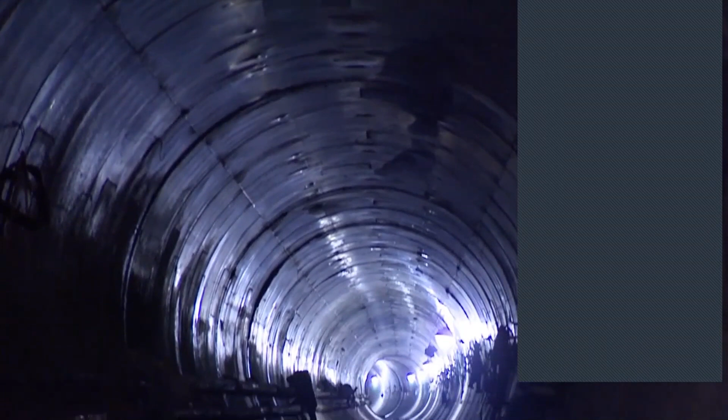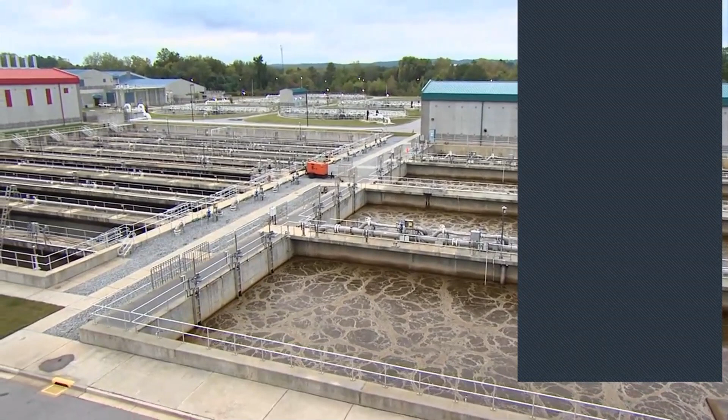During dry weather, it's not a problem, but when it rains and a pipe fills capacity, electronic sensors are triggered. Sewage and stormwater containing pollutants from the streets are discharged into the river, violating the Federal Clean Water Act and generating millions of dollars in fines. And EPA has been demanding of most cities that they build big tunnels, big tanks, big storage systems in order to be able to handle the additional flow from rainfall. The problem is they cost $8–10 billion, and we didn't have $8 to $10 billion.

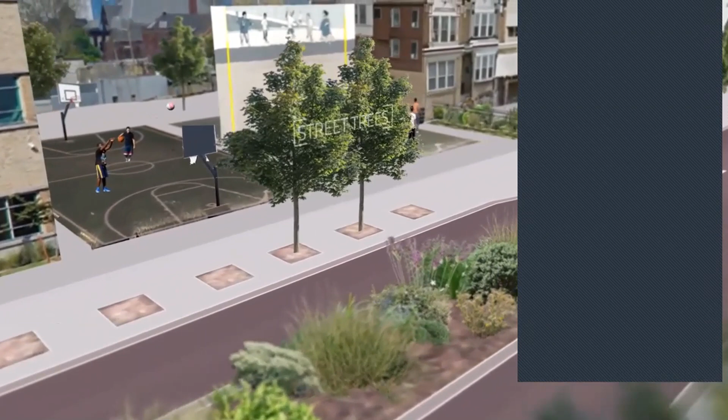So we took a different attitude. We said, well, why don't we try to manage the water before it gets into the system? Every dollar we spend gets spent on the surface, creating a more sustainable city. We call it green infrastructure. Others call it green stormwater infrastructure. Whatever you call it, it's really about managing the rainwater and doing it in a way that gives some extra benefit back to the community.

On April 10, 2012, the leaders of the City of Philadelphia and the Federal Environmental Protection Agency announced an historic agreement. It allowed the city to institute Green City Clean Waters, a program to transform a third of the city's hard surfaces with green.

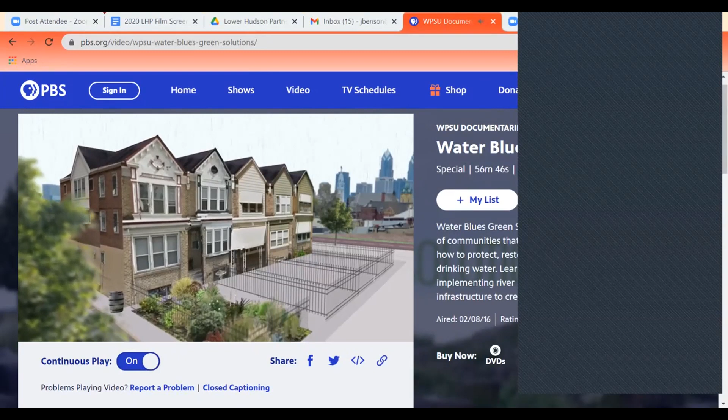Our goals are to place 10,000 greened acres around Philadelphia. That is a dramatic change. We're talking about doing it over a 25-year period. So this 5 years is really the experimental time. It's the time when we figure out what are the good designs for how you take water and infiltrate it into the ground.

As part of the Green City Clean Waters program, the Philadelphia Water Department is experimenting with an innovative approach to capturing stormwater on the properties of individual homeowners. Yeah, come towards me.

We have a lot of residential customers in the city of Philadelphia, and we wanted them to be able to participate in Green City Clean Waters right in their own backyards. The goal of the program is to provide something that benefits them and helps the city of Philadelphia. And so through the program, the water department helps pay for the cost of installing stormwater management tools. So if the water from your front walk is running into the street, then that would be a good opportunity for us to do something.

So I've been with the water department a year now, and I studied urban and environmental planning, and I was really interested in Green City Clean Waters. Philadelphia is leading the way there, and I wanted to be a part of that.

Whatever shape you need. The water department will reimburse up to a 6-foot long planter box. Okay. On this particular property, she has a couple of good options, one of which would be a rain garden in the front yard, which would be a nice little landscaped space. It'll look great. It'll soak in a fair amount of stormwater. So then you'll have part of your crew working here and part of them working on the downspout. The piping work, yes.

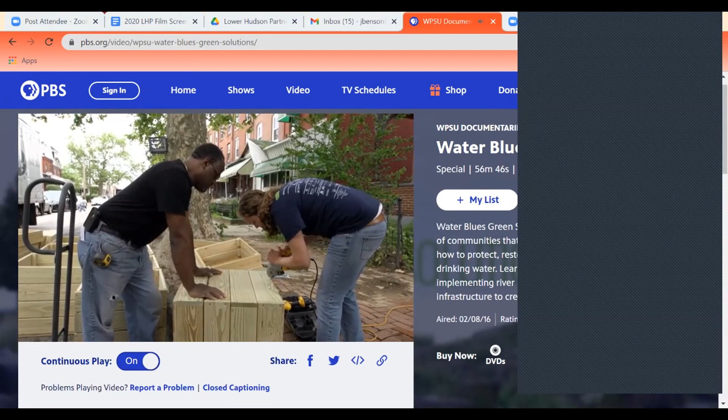Transforming how a major city manages its stormwater can't be accomplished by one city agency alone. To transform the fabric of a neighborhood, it requires partnerships with grassroots organizations with boots on the ground. We are a nonprofit that does free critical repairs for low-income homeowners. That includes energy efficiency work, health and safety repairs, and anything critical to a home. But we cluster that work on blocks where we do multiple homes.

Brown Street. And today our focus is on the stormwater management piece. Today we are installing downspout planters, and that's a box that goes at the bottom of a downspout, and it manages roof runoff that comes down your downspout, and you can plant it like a regular planter.

I've learned about sustainability and consumption and all that, and that's a good way to conserve water. And also it looks nice when you put your flowers in there.

I want to put mint in mine. Yes, I'm going to make tea, but I'm going to make mojitos also.

The water department has taken a truly grassroots approach to sort of, we'll do it bucket by bucket, house by house. We absolutely hope that we can educate more people about the environment and stormwater management specifically for the water department. And I think we've been able to build community as well.

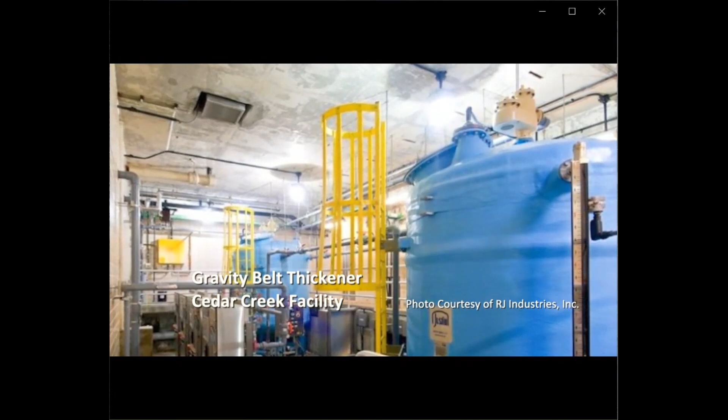Nassau County has been on the forefront of stormwater management since the 1930s. We've installed a number of green infrastructure components at 2 industrial type facilities in Nassau County, at both the Cedar Creek Water Pollution Control Facility in Wantagh and the Bay Park Sewage Treatment Facility in East Rockaway, where we installed almost like a laundry list of green infrastructure technologies as a way to show other municipalities who have these facilities these components, how they work and how effective they are.

Operation Splash is a grassroots, all-volunteer organization dedicated to cleaning up all the debris out of the South Shore Estuary Reserve in Nassau and now into Western Suffolk County.

In Splash's education program, we try to explain what a watershed is to young kids. And we tell them basically if you were to take a pile of dirt and take a cup of water and pour it on top of that pile of dirt, all the water would run down to the side and out to the bottom. And the bottom of the pile of dirt is the bays or the Sound. So any garbage that's on that mountain or in that watershed area is going to come out into the bays or to the Sound. And the kids pick it up like that. By itself, rainwater is pure and wonderful, but when it picks up our garbage, it's a problem.

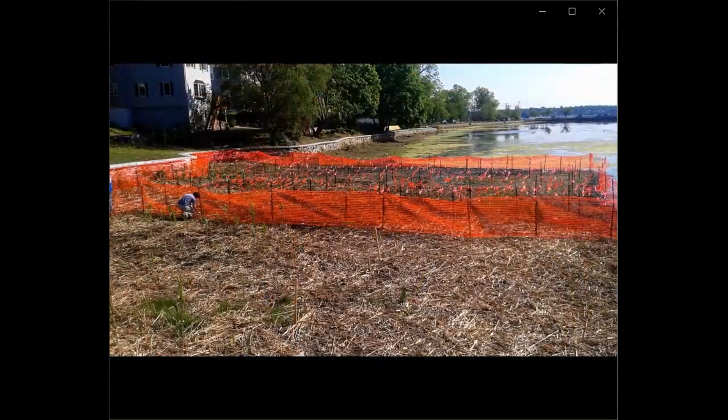There are so many people, so many organizations around New York State that are dealing with these issues. It's really hard to name them all. We have the soil and water conservation districts. We have intermunicipal protection committees, for example, the Hempstead Harbor, Manhasset Bay, and Oyster Bay Cold Spring Harbor committees, and the Peconic Intermunicipal Consortium here on Long Island. There are also joint efforts in upstate New York.

The DEC has entire programs directed at this, as does the EPA. The Audubon Society, Friends of the Bay here on Long Island. Schools are doing a lot. And also, let's not forget the business community. There are a number of businesses now that are looking at practices, ways that they can provide our communities with practices that can help us deal with this kind of pollution.

Water Wash here in Mattituck is basically a redesigned public boat ramp, which was created to keep stormwater from running directly down the boat ramp into surface water and to give it time to slow down and infiltrate into the ground before it ever reaches Mattituck Creek. The stormwater runs off the road. Essentially, what used to be a dirt drive area has gravel. That gravel driveway slows stormwater down and allows some pollutants to drop out at that level.

The stormwater that passes the gravel gets to the porous paving area, and that porous paving area allows more of the stormwater to filter down into the ground. And by filtering down into the ground, the pollutants are kept out of the surface water. And in the event of a very large rainstorm, any water that gets over the filter pavement goes into a natural drainage swale, and that swale retains remaining stormwater, giving it a longer period of time to soak into the ground before it reaches Mattituck Creek.

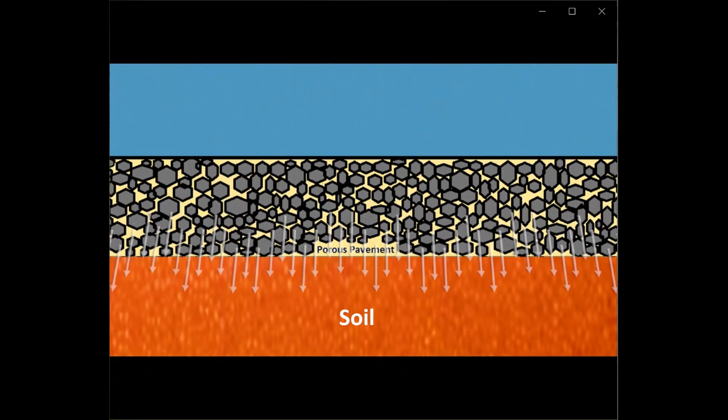Porous pavement is one type of green infrastructure, and porous pavement essentially is a hard surface that has the ability to absorb water. When you put water on top of a porous pavement, you still have the hard structure of pavement, but the water goes down through it as opposed to sliding over it. And by retaining that water going down as opposed to over the top, you can hold pollutants back, you can hold sediments back, and you can provide for better water quality protection at the end of the line.

Rain garden is a shallow bowl that we direct water to on purpose. Rain gardens mimic nature. So what we try to do is we have a spot for water to be collected, and then we let that water soak back into the groundwater. If the water soaks in a day or less, it's a rain garden. If the water sits there longer than a day, it's not a rain garden. It's a swamp, a bog, or something else.

So then we plant that rain garden with deep-rooted plants. The plants take up that water, soak up that water, use that water, and clean that water almost to drinkable standards within 2 to 3 feet underneath that soil.

Most people think that a rain garden is a wet spot, so you want wet plants. It's actually the opposite. You actually want dry plants that can handle some water, not wet plants that can handle drought. The rain garden is only wet when it rains, so it's only wet a small percentage of the time. You want more dry plants that can handle water.

Hydrangeas do make a good rain garden plant, as well as black-eyed Susans and purple coneflowers, a number of trees and shrubs. You can put rain gardens in shade, so that hydrangea for the shade, but also hostas and ferns and things like that work well in the shade, so you can go in either direction.

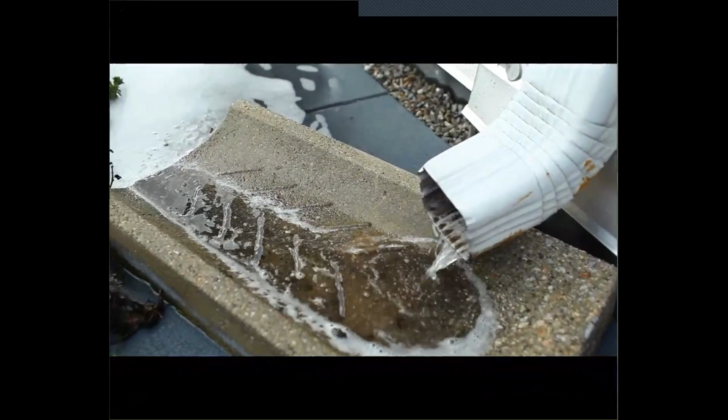The first step for us was to contact the residents, meet with them, and explain what we're trying to do and why this would be a good project for them. Cooling costs might go down. Apartments that are below the green roof should see electricity bills go down because of green roof's cooling effects on building temperatures. We also talked about having the green roof being good for creating native habitats.

Even with the sedum, we might have some beneficial insects that come and maybe reduce the number of mosquitoes that are around. Once we had everything in order and ready to install, the installation itself only took 2 weeks.

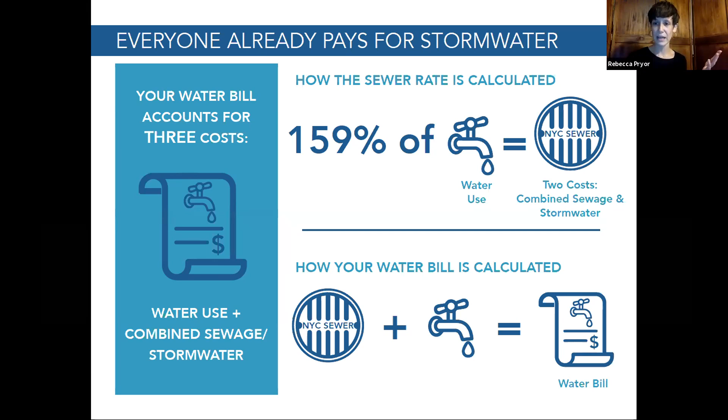So for New York City, 159% of your water use cost basically creates that sewer fee that pays for stormwater infrastructure and sewer infrastructure. So 159%, kind of a random number, and we'll see how that plays out in a moment. So what does that pay for? We saw in the film, it pays for gray infrastructure like tanks and tunnels, and then it also will pay for green infrastructure like green roofs and bioswales, etc.

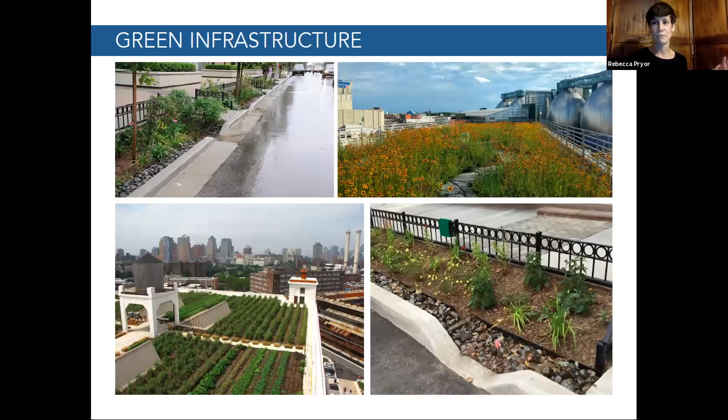So why is this inequitable? That's what Jen just asked me. Basically, the amount of stormwater that you contribute to the system is not really based off the amount of water that you use in your home. And as some examples, I'm going to talk about a parking lot versus a brownstone.

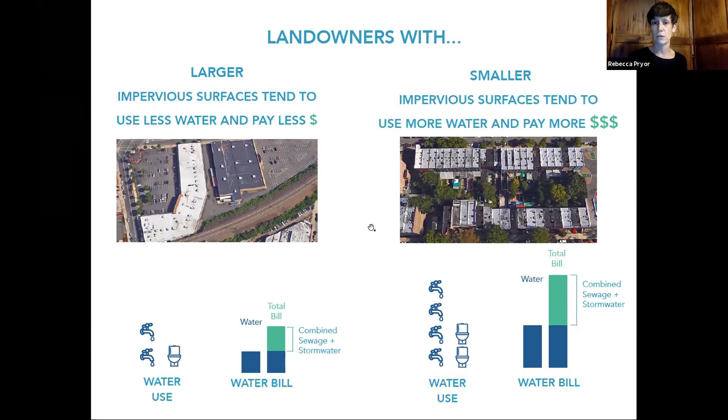On the other hand, a brownstone is going to have more toilets, it's going to have more sinks, and therefore its water bill is going to be higher, and the amount it pays towards the sewer and stormwater infrastructure system is also going to be higher. The issue is that the parking lot obviously contributes a lot more stormwater than the brownstone does, but the water rate stays the same, and that contribution is not calculated into the final calculation.

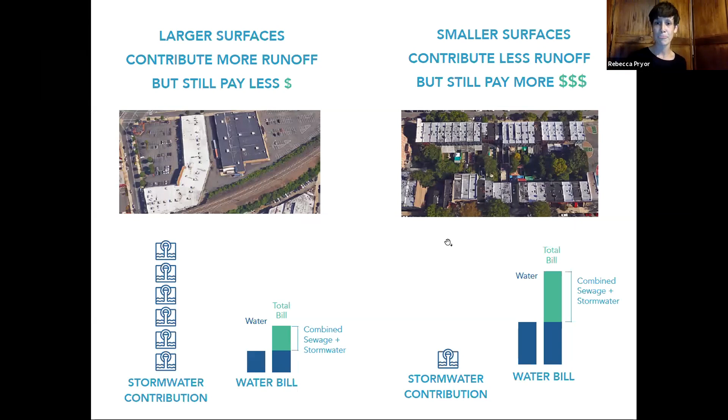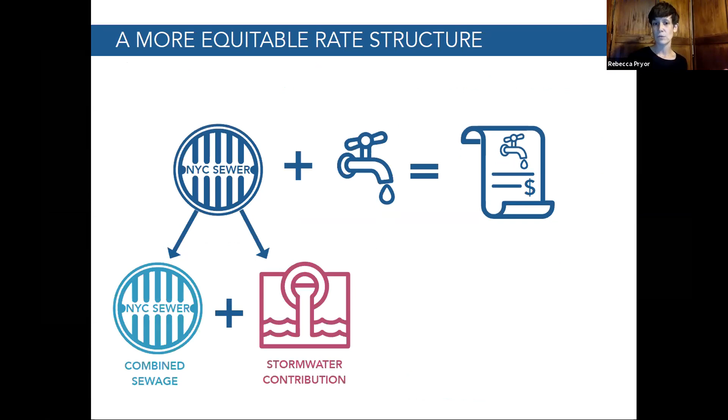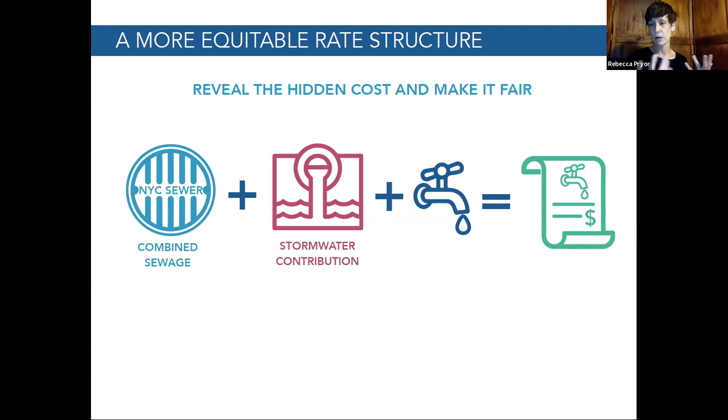Okay, so how do we create a more equitable structure? We take that original equation that we looked at and we really just break it down. We're like, okay, that fee consists of combined sewage and stormwater contribution, and we're going to parse that out, and we're going to say exactly what stormwater contribution means. So NRDC, Riverkeeper, and our partners at Valor Analytics created a stormwater dashboard tool, and it really is to help municipalities figure out what is this cost of stormwater infrastructure that we're talking about.

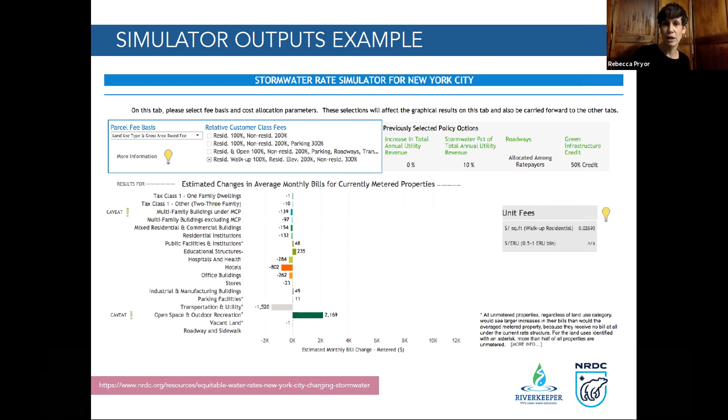So that just gives you a sense, oops, I've lost you. That just gives you a sense, great. I think I've stopped sharing my screen. Okay, that gives you a sense of kind of the system.

Thanks, Jen. And so is that dashboard tool something that everybody can access and look at? I will put it into the chat now. Awesome. That's great. I'm sure we'll have lots of wonky fun playing around with that.

So MaryJane, we're curious as to whether pressure is being applied in Westchester County, whether that's from county departments or from community residents who know about this and who want green things in their spaces, and if it's coming, where is it coming from and where should it be coming from?

You got to unmute yourself. You're still on mute.

Sorry about that. Okay. We on the Board of Legislators, when we receive capital projects to do repairs and upgrades at our facilities, we generally always ask about what can be done in terms of pervious surfaces, what can be done in terms of landscaping, putting in the right plants for the right place, to work on issues like stormwater management. And I think hearing that over and over again, especially with an administration that has progressive tendencies, is starting to move the conversation a little bit.

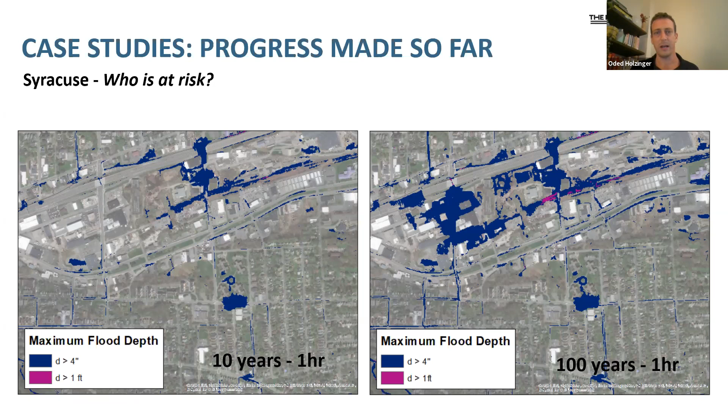And then next, the second element of the modeling work is also where you can intervene and how you can intervene. So we expected capacity of water retainage for each type of green infrastructure tool is, and we can use it to think about where do we want to remove the first inch of runoff, as well as where it will impact. What is the area that will be impacted by this specific intervention, specific green infrastructure?

And when we are able to show that to the city, to the planning department, to the engineering department, we can build trust with them for how beneficial this could be for a certain area, when sometimes there is doubt in those tools.

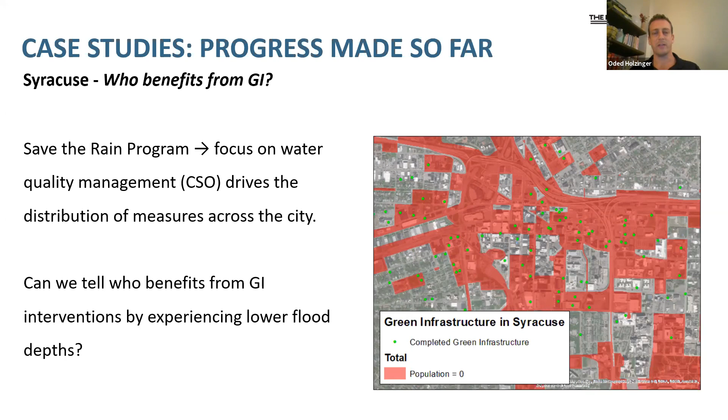Now, there is another question that comes up here, which is for each municipality, for each city, what is the most desired benefit? Because some municipalities would like to prioritize the highest property value, for example, and prevent flooding there. Others would like to prioritize roadways and major transportational infrastructure. In the case of the work that we're doing, which has a strong environmental justice element, as I mentioned, we're working to identify the most vulnerable communities. And so we're looking at level of poverty, density, how many people will essentially be impacted by it.

Now, in the case of Yonkers and many other post-industrial cities, oftentimes those things will work together. For example, in Yonkers, those areas that were redlined back in the days that are home to the most vulnerable populations would usually also be where major throughways and transportation channels will go through. Like in the case of Yonkers is the neighborhood of Getty Square with a lot of vulnerable residents, as well as major throughways leading to the downtown area. So you can get the dual benefit there.

Now I want to go back to this slide to show another great benefit of using this tool, which is understanding, again, especially with a topography like the city of Yonkers, whether you implement green infrastructure in the lower areas where runoff is expected to accumulate will have some effect. But if you find the source of that puddle, the source of this runoff accumulation, and that could be whether it's the slope side where runoff will get channelized through the lower areas until it hits that low point, or when it comes to the ground cover, we're talking about the most impervious surfaces that might become those channels. So roads would oftentimes, that's where you'll get those channelized streams of runoff.

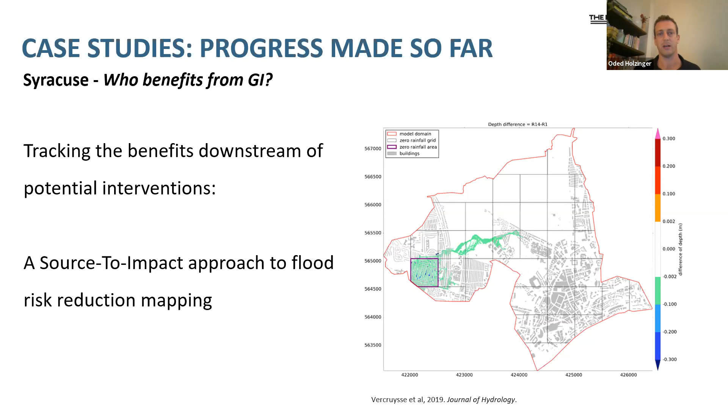So if you implement green infrastructure, if you put a bioswale or a rain garden there, you might remove that first inch of water or the first hour of runoff and impact a much greater area. And so this really helps us guide the city to where we will get the best impact for the specific criteria that we would like to look at for reducing the risk of flooding and the impact of flooding on the community.